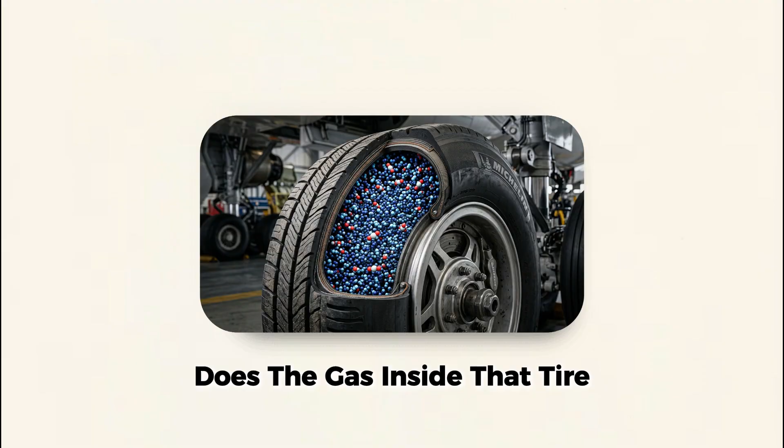How does a tire filled with ordinary air become a potential bomb at 38,000 feet? And why, at the exact moment a 560-ton aircraft slams back onto the runway at 290 kilometers per hour, does the gas inside that tire determine whether everyone on board walks away? And why does every airline on Earth, from a budget carrier running aging 737s to the engineers behind the Airbus A380, all agree on one specific molecule that regular air simply cannot match?

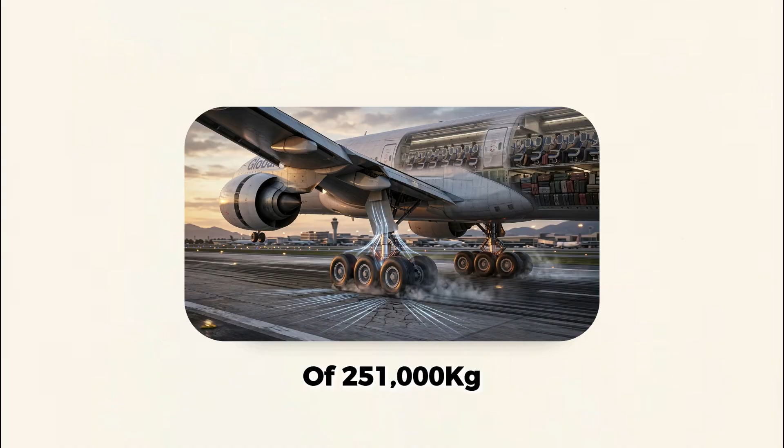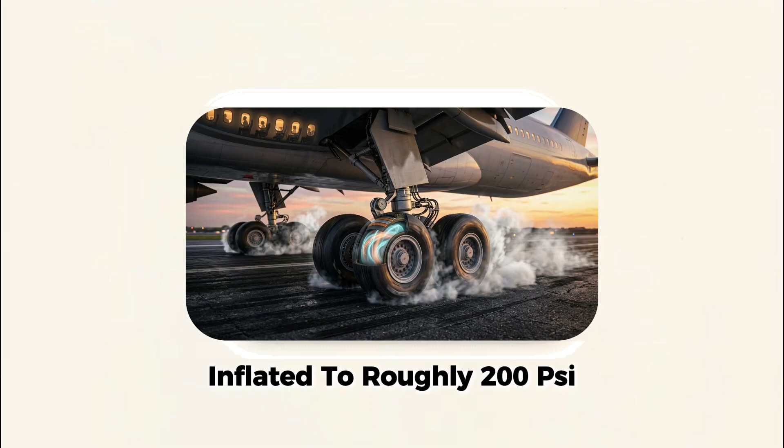To understand what's at stake, you need to feel the numbers first. A fully loaded Boeing 777-300ER touches down with a maximum landing weight of 251,000 kilograms. That's the equivalent of stacking 167 adult male African elephants on a 6-tire main landing gear. Each of those tires is inflated to roughly 200 psi.

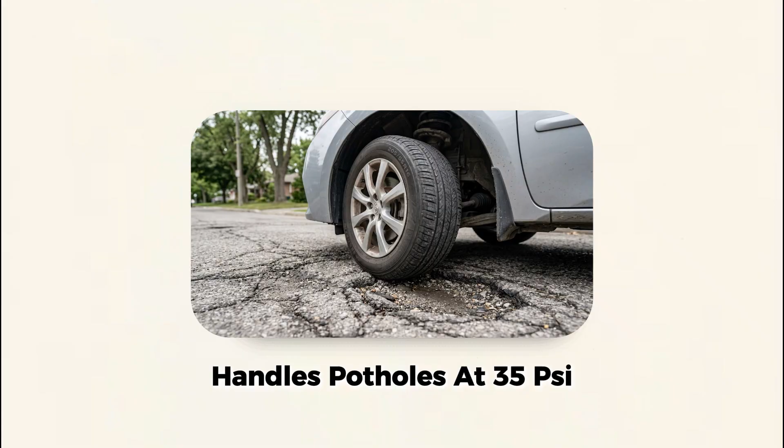The answer starts in the early days of commercial aviation, when the answer to the question, "What do we put in airplane tires?" was exactly what you'd expect from an industry still figuring out how not to kill people: compressed air, pumped from a standard ground compressor. And for a while, it worked, mostly. Propeller-driven aircraft of the 1930s and 1940s were lighter, slower, and landing speeds rarely exceeded 130 kilometers per hour. The rubber held, the air held, and nobody asked too many questions.

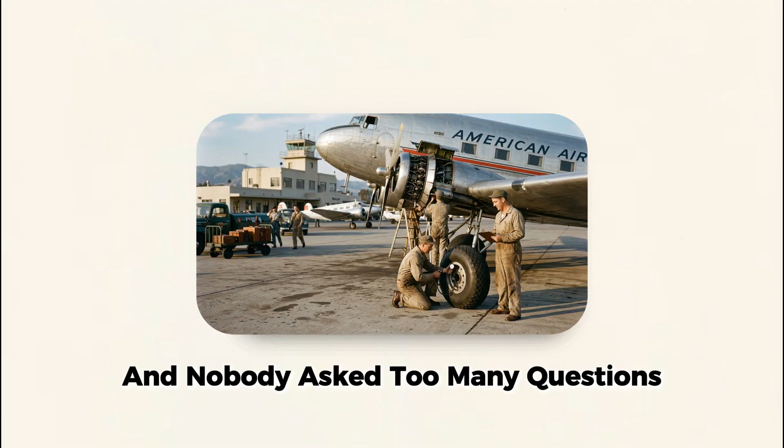But then something changed. Aircraft got heavier by orders of magnitude. Jet engines meant cruising altitudes above 10,000 meters. Landing speeds climbed past 250 kilometers per hour, and engineers started noticing a problem that regular air had been quietly hiding from them all along.

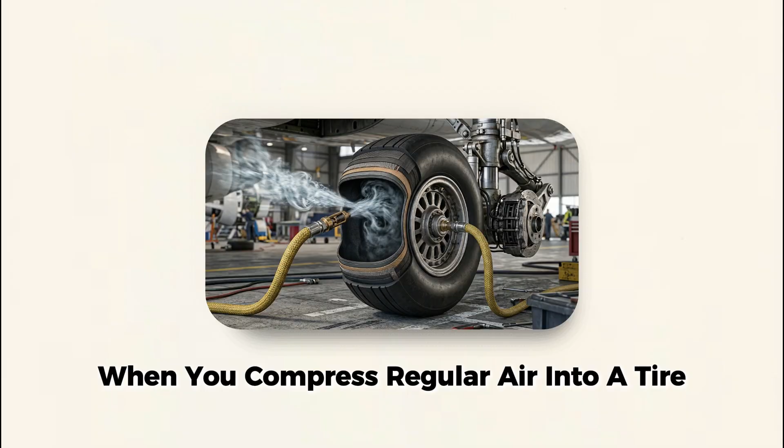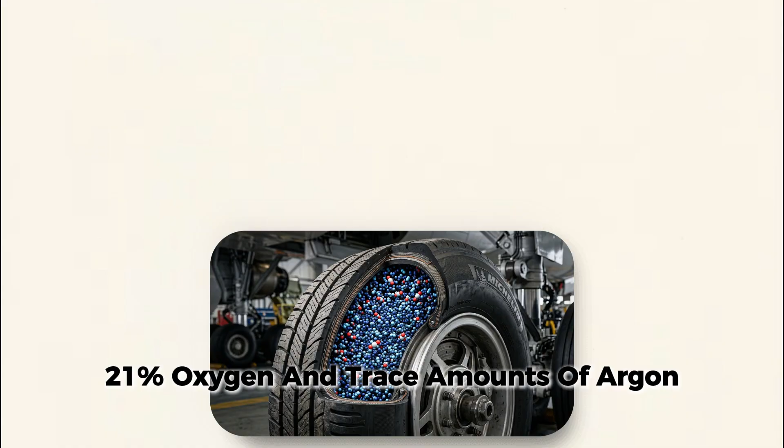When you compress regular air into a tire, you are not just compressing one gas. You are compressing a cocktail, roughly 78% nitrogen, 21% oxygen, and trace amounts of argon, CO2, and water vapor in various forms. At ground level, on a cool morning, that cocktail behaves itself. But at 38,000 feet, the temperature outside the aircraft's skin drops to negative 56 degrees Celsius.

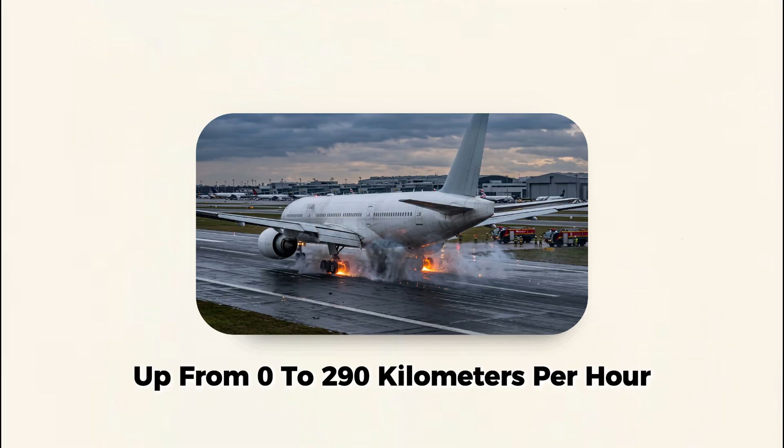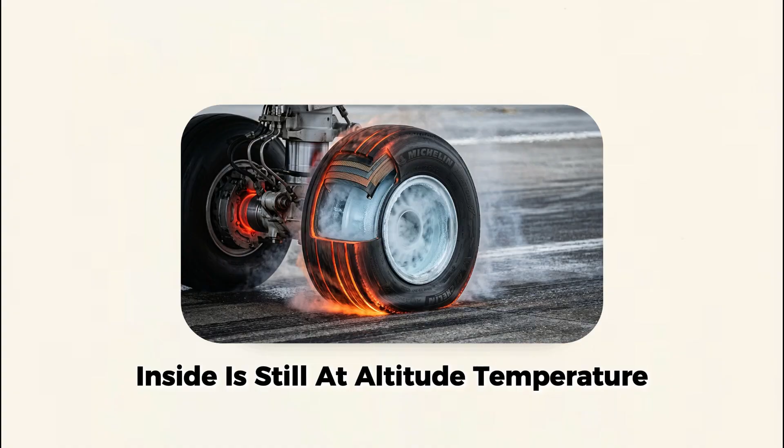And on landing, when the wheel spins up from 0 to 290 kilometers per hour in the first fraction of a second after contact, friction heats the tire from the outside, while the compressed gas inside is still at altitude temperature. The tire doesn't just warm up. In extreme cases, brake heat builds to over 1,000 degrees Celsius during rejected takeoff scenarios.

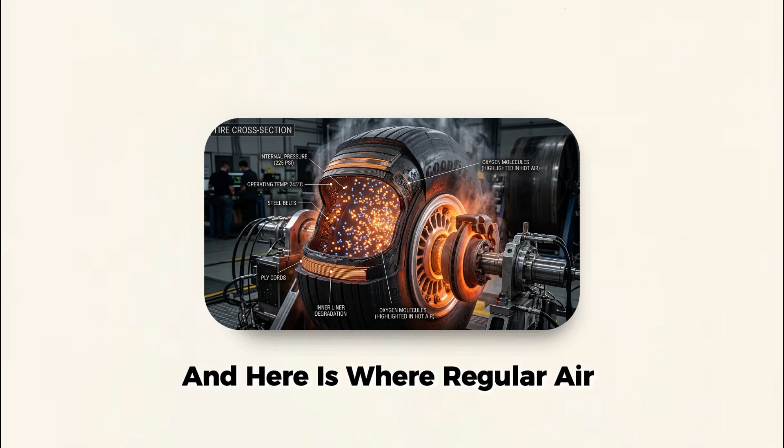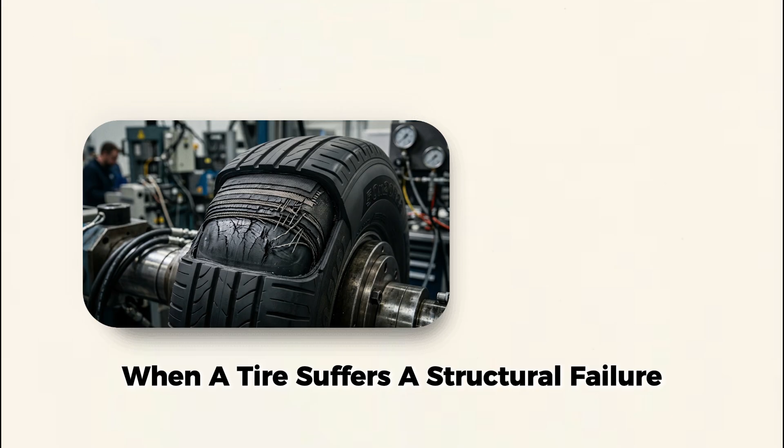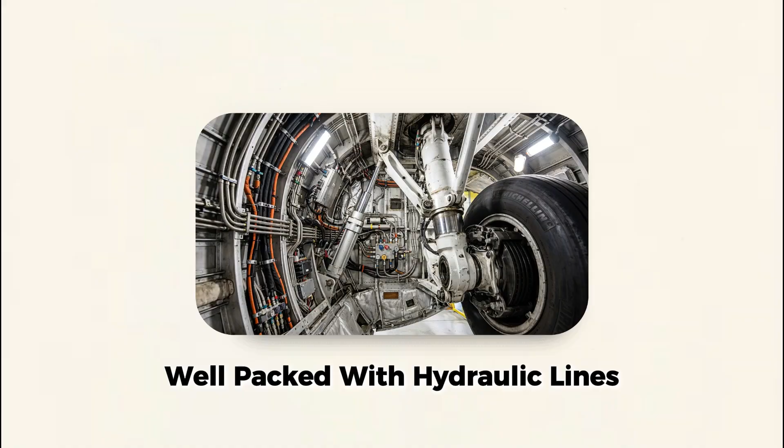And here is where regular air reveals its fatal flaw. Oxygen burns. This is not a complicated concept, but its implications at aircraft tire pressures are catastrophic. When a tire suffers a structural failure or a brake overheats to the point of ignition, the 21% oxygen inside a standard air-filled tire doesn't just allow combustion, it actively feeds it. Rubber at high pressure, inside a wheel well packed with hydraulic lines, fuel system components, and structural aluminum, does not need much encouragement to turn a brake fire into something significantly worse.

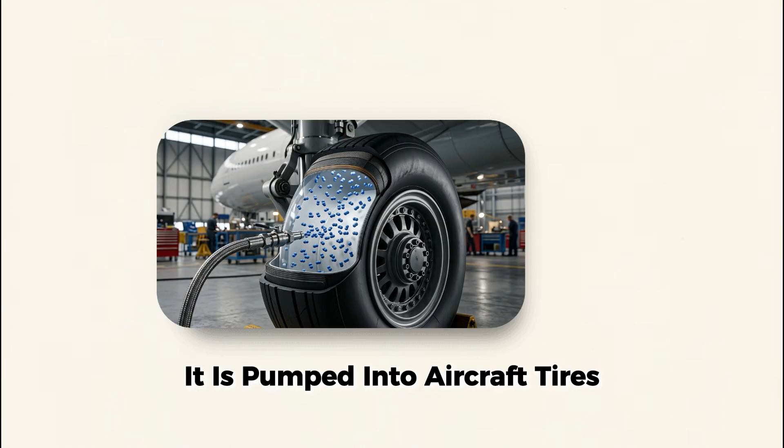Aviation engineers looked at this risk and made a decision that sounds almost absurdly simple: remove the oxygen entirely. Nitrogen is what remains. Pure, dry, inert nitrogen, the same gas that makes up more than 3/4 of the air you're already breathing. It is pumped into aircraft tires at a purity level above 95%, and often above 98% on commercial jets.

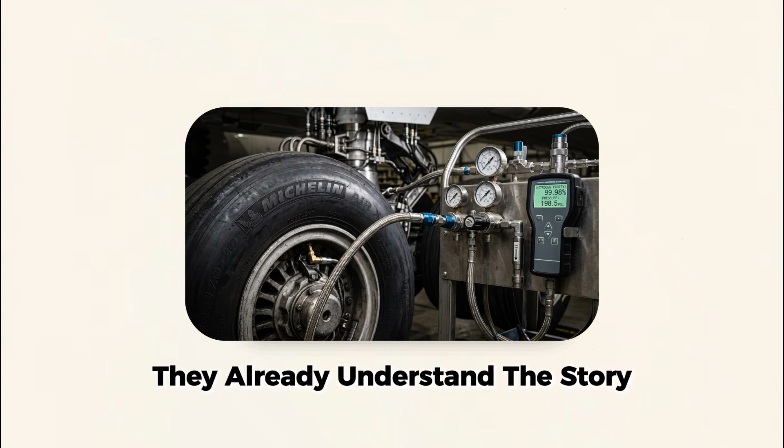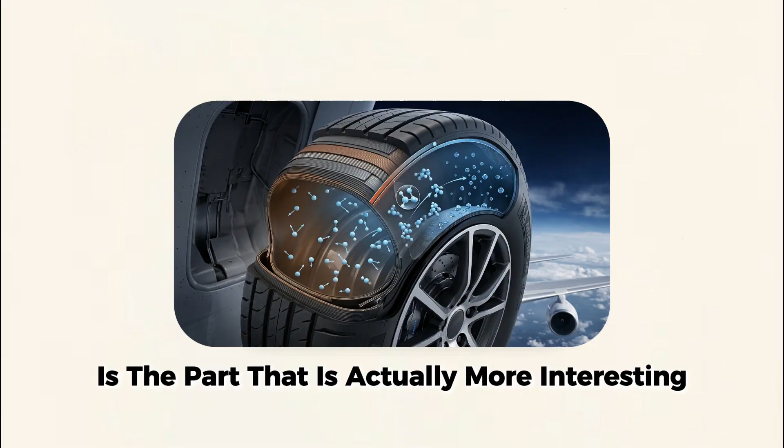And this is where most people assume they already understand the story. They think nitrogen is used purely to prevent fire. They are half right and half wrong. And the half they are wrong about is the part that is actually more interesting. Here is the myth: nitrogen is heavier than air, so it leaks more slowly.

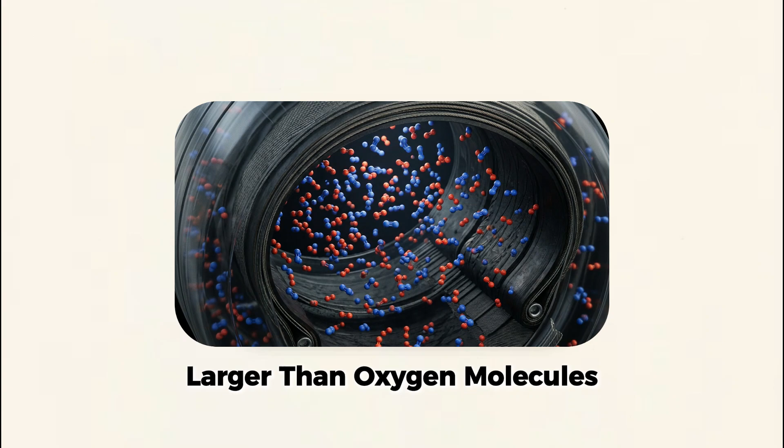You may have heard this in the context of car tires, where it is mostly a marketing claim with only marginal real-world benefit. In aircraft tires, the leakage argument matters, but not because of molecular weight. Nitrogen molecules are not dramatically larger than oxygen molecules. The real reason nitrogen holds pressure more consistently inside an aircraft tire has nothing to do with the molecule's mass, and everything to do with moisture.

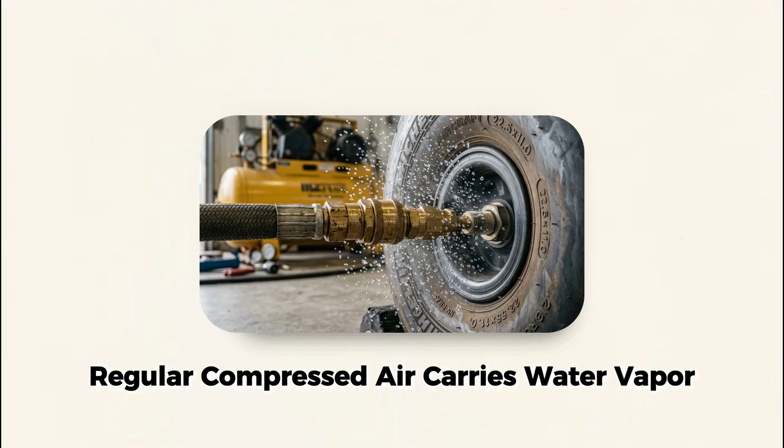Regular compressed air carries water vapor. If you've ever watched a pneumatic tool release a burst of moisture-laced air on a cold day, you've seen water vapor condensing out of compressed air in real time. Now take that same phenomenon and scale it to aircraft operating conditions.

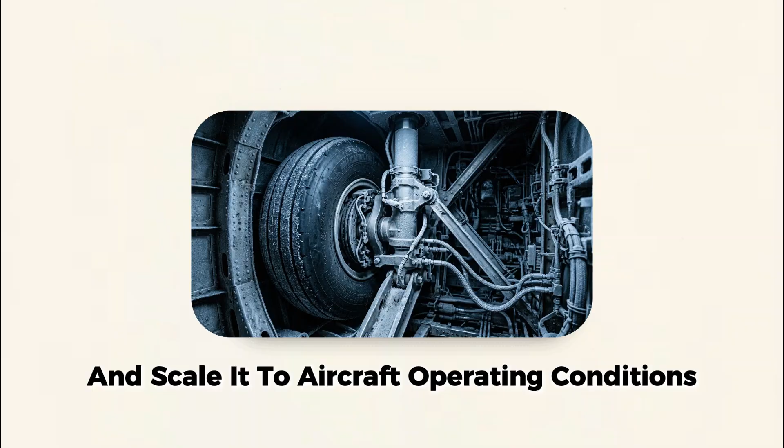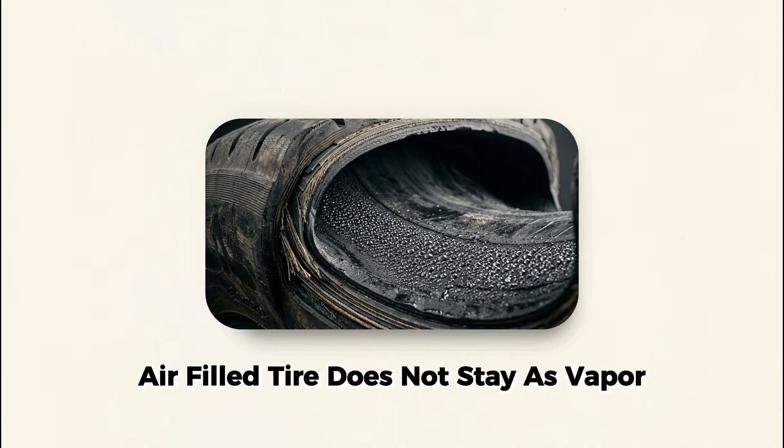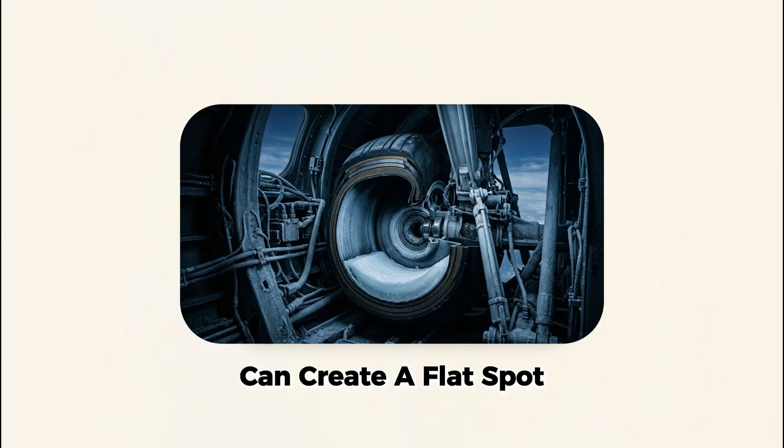At altitude, temperatures inside an unpressurized wheel well can drop to -40 degrees Celsius. The water vapor inside a regular air-filled tire does not stay as vapor. It condenses into liquid water, and then, in severe cases, it freezes. Liquid water pooling inside a tire adds unpredictable mass imbalance. Frozen water at the base of a tire, with the wheel at rest during cruise, can create a flat spot that the tire never fully recovers from. And more critically, as the tire heats rapidly on landing, that trapped moisture turns to steam, creating a micro-pressure spike inside an already highly stressed structure.

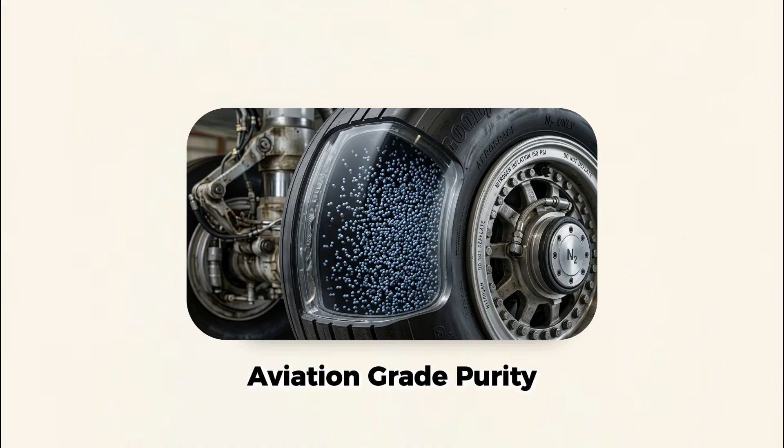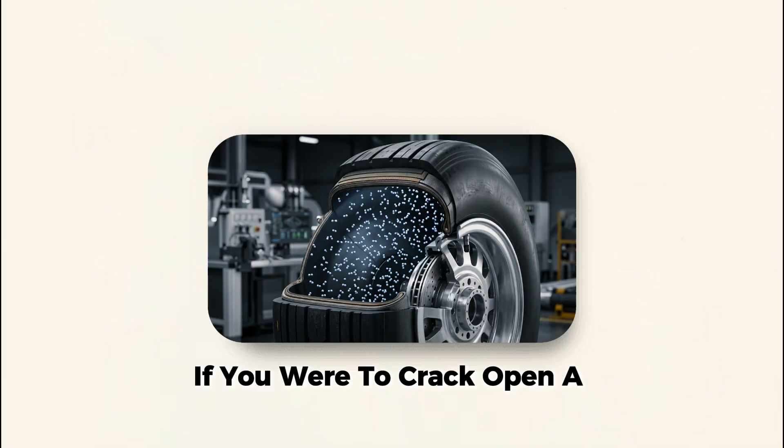Nitrogen, when supplied at aviation-grade purity, contains almost no moisture. The dew point of aviation nitrogen is specified to reach as low as -65 degrees Celsius, meaning there is effectively no water vapor present to condense, freeze, or flash into steam. If you were to crack open a commercial aircraft tire valve and measure the humidity inside, it would read close to zero. The tire's internal environment is, in the most literal sense, engineered to be indifferent to temperature extremes.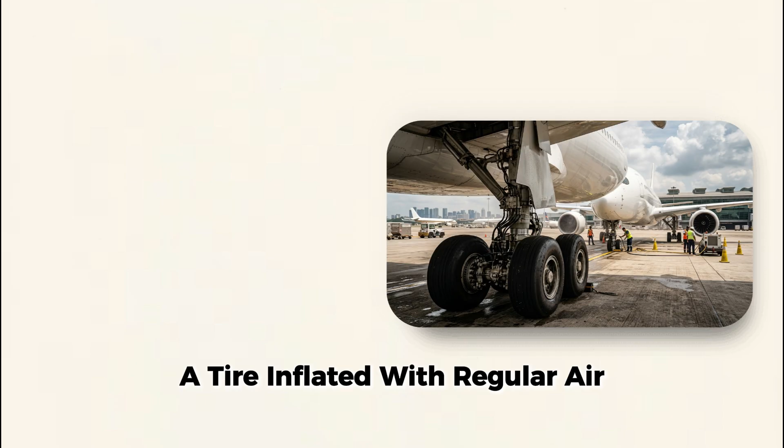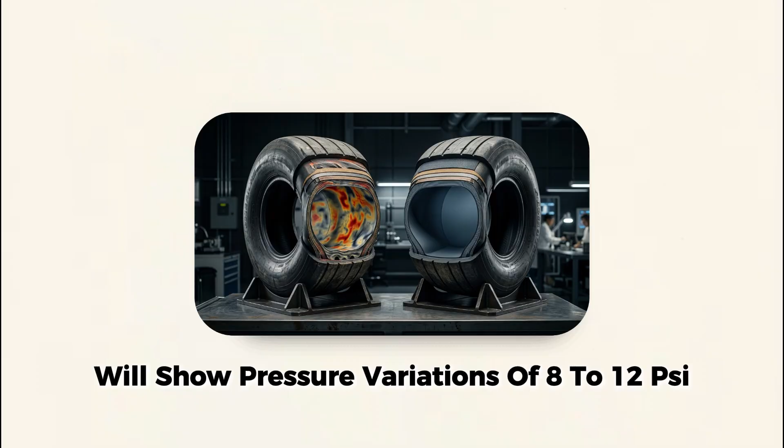Now consider the pressure consistency this enables. Tire pressure on a commercial aircraft is checked before almost every flight. A tire inflated with regular air and subjected to the temperature swings of a trans-Pacific route, from a humid 35-degree day in Singapore to the thermal shock of cruise altitude, and back to a runway baking at 40 degrees in Dubai, will show pressure variations of 8 to 12 psi throughout that journey, just from moisture behavior alone, before accounting for any physical leakage.

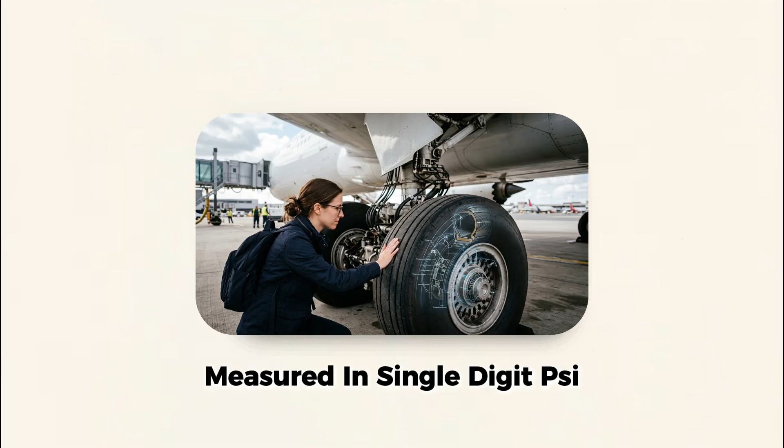A nitrogen-filled tire running the same route in testing shows a variation of under 2 psi. That 10 psi difference is not trivial. Manufacturers publish tire pressure limits with tolerances measured in single-digit psi. An underinflated tire at landing doesn't just wear faster, it flexes excessively under load, builds heat in the sidewall, and in catastrophic cases, can separate.

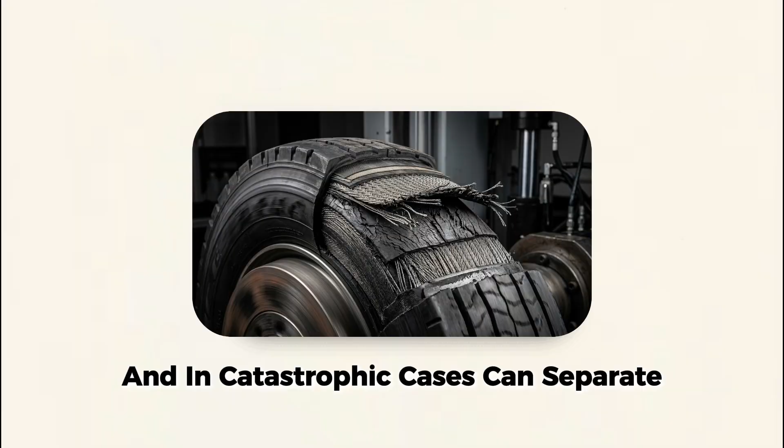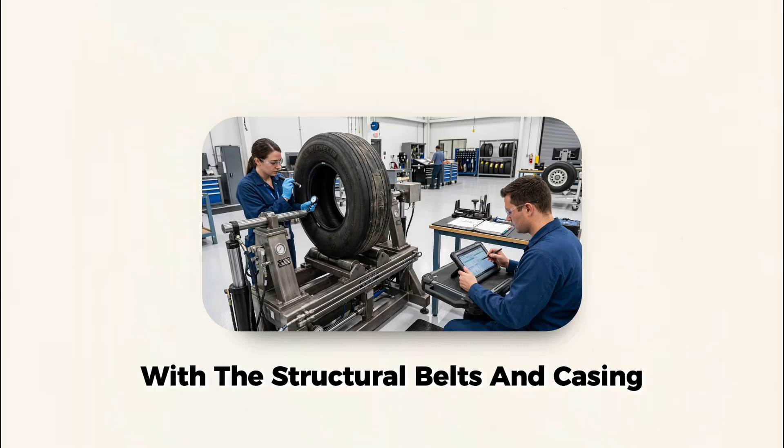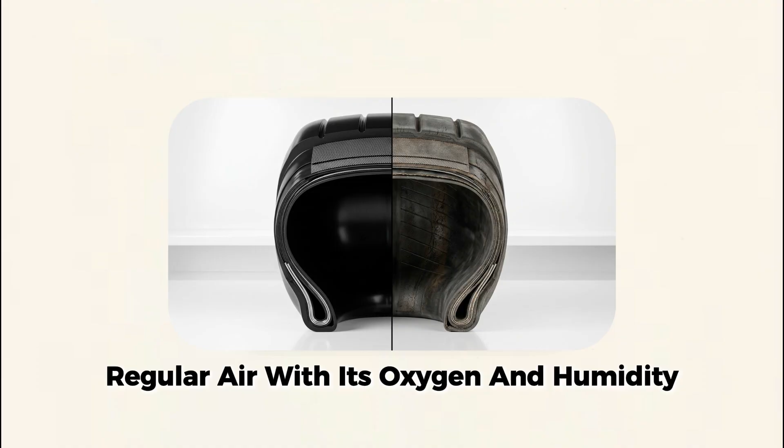There is one more layer of hidden genius in this system that most people never consider. Aircraft tires are not simply replaced when they go flat. They are retreaded. The carcass of a commercial aircraft tire can be retreaded up to 7 times, with the structural belts and casing carefully inspected and recertified between each use. The nitrogen atmosphere inside the tire between uses acts as a preservation environment for the rubber compounds and bonding agents in the carcass. Regular air, with its oxygen and humidity, accelerates oxidative degradation of rubber over time.

A tire stored fully inflated with nitrogen for months between inspection cycles arrives at its next retread with its internal structure in significantly better condition than the same tire stored with regular air. The airline isn't just filling the tire with nitrogen for the flight. It is preserving a precision-engineered component worth thousands of dollars per unit across its entire service life.

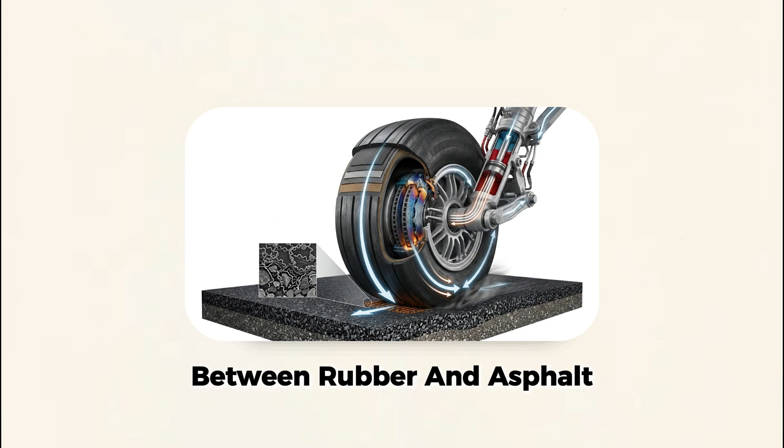Every single time a commercial aircraft touches down, hundreds of thousands of times per day across the global fleet, that moment of violence between rubber and asphalt is managed by a century of material science, a decision made decades ago about a single molecule, and a level of engineering intention that extends all the way down to the precise humidity specification of the gas inside a tire that most passengers will never once think about. The invisible choices are almost always the ones keeping you alive.